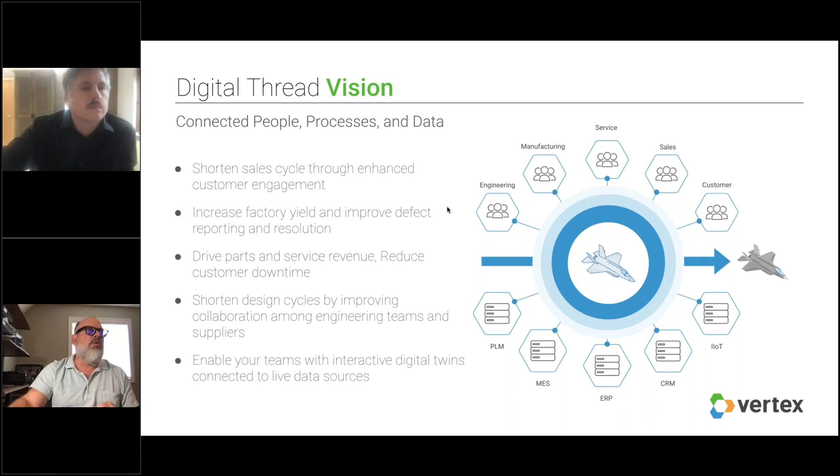So now I want to kind of take a look back and really assess where we're at. Frankly, because we do have some work, and that's one of the reasons Vertex is a company and why we're here today. We think we can help with this. So the reality is engineering still struggles with sharing product data downstream, or look at it from outside looking in. Other groups really struggle with getting engineering data out of engineering. And so there's still siloed departments, and this can be both technically and of course culturally as well.

We know that manufacturers look at problems differently than design engineers, service engineers, those kinds of things. Again, the struggles with PLM access. I think the folks like Siemens and Teamcenter, they've made some great strides in working on some of these aspects of system of engagement, including having more task-based UIs and those kinds of things. But I think we could all agree, it's just not quite there for all the groups that need it.

Again, this idea that systems of record, these are fairly rigid systems. You've got a CRM database, you've got an MES database, you've got a PLM database. They certainly have integration possibilities, but they're not exactly what you would consider to be loosely coupled in a way that you could connect them through data linking and data mashups easily with the system of engagement. And so we're trying to help those systems of record achieve that kind of connectivity and nimbleness, frankly, from a data standpoint.

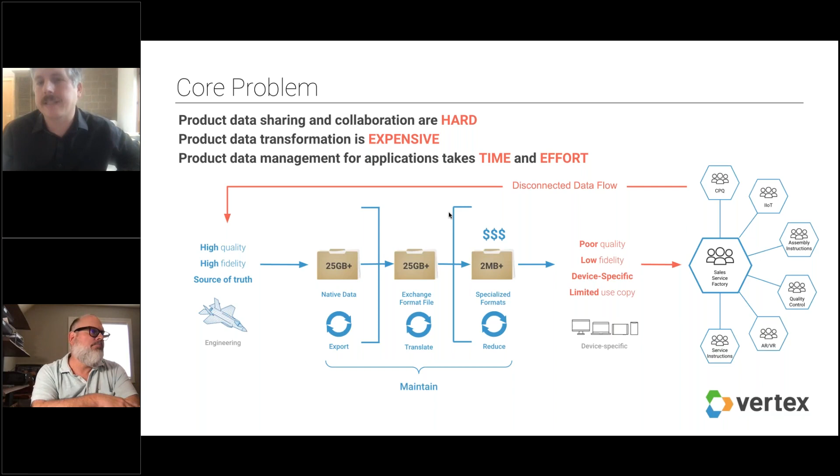And simple things like being able to identify parts and add context to parts or digital twins, it's just disconnected. And it's very rare for engineering to be able to quickly and easily access that. And we'll talk about some of the use cases that could help enable. But the way that we see Vertex helping untangle this digital thread is really, again, trying to get your product data, and there are some challenges on why that product data is so hard to communicate in the digital thread.

I would say certain data sets that are more relational in nature, think about something like a defect issue or a service ticket. It's structured information, and that can easily be used in a data architecture where I can create a mashup of those different data sources and deliver that downstream. However, with engineering data, there are some fundamentally core differences, and like we were talking about before, there's some sensitivity with intellectual property on that.

The end user interface is complex. Not everyone's a CAD designer. You need hardware, you need software to view it. And Vertex really frees the constraints of this.

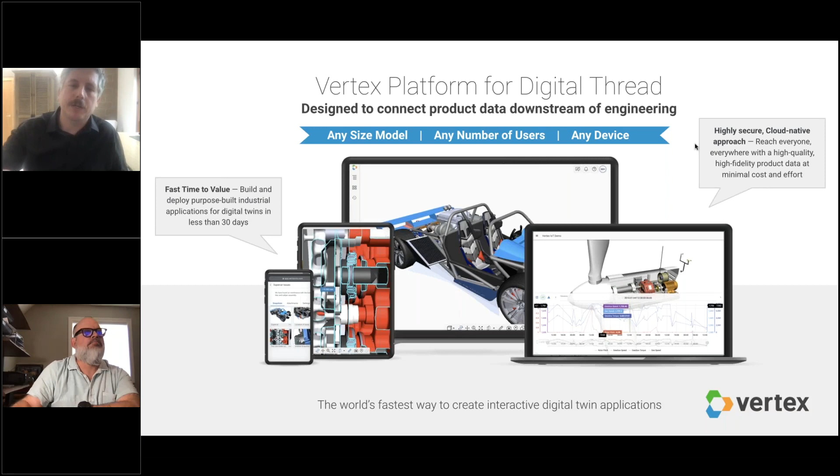And if I'm in field service, how do I get access to telemetry coming from that product? How do I get access to the exact configuration, the serial number of that piece of equipment? How do I identify parts? Those things are very specific to me in the field, versus manufacturing, where it's totally different. And same thing with, we've got plenty of customers using us for things like sales and engineering design collaboration with the supply chain.

What makes the Vertex platform different? One, instead of trying to figure out how to do a file-based approach where I'm passing these files along the digital thread, we've really thought through, if I can get that data into one place, and keep that data centrally located so I have access control, now I can manage consumption of that data downstream. And so the way that we're building our platform allows you to just stream that data. So I'm not actually sending the data, I'm streaming the data to these different groups and connecting that to different systems of record.

We've specifically designed our platform to be easily consumable from both a user interface standpoint as well as an API and SDK. And we've had a lot of success with customers building digital thread and Industry 4.0 applications, specifically for mobile and low-powered devices. And what I'll do here is quickly talk through a few use cases, and then I'll show a demo.

These are some customer problems that we've been encountering both with prospects and our current customers. But the big one is, can I get the digital thread to help me understand and improve my designs? Can I send that design out to get DFX type feedback? Can I get information about issues with design for manufacturability, service, warranty? When I go to build the next iteration of my design, how easy is it for me to collect all that feedback and look historically at how the design was performing?

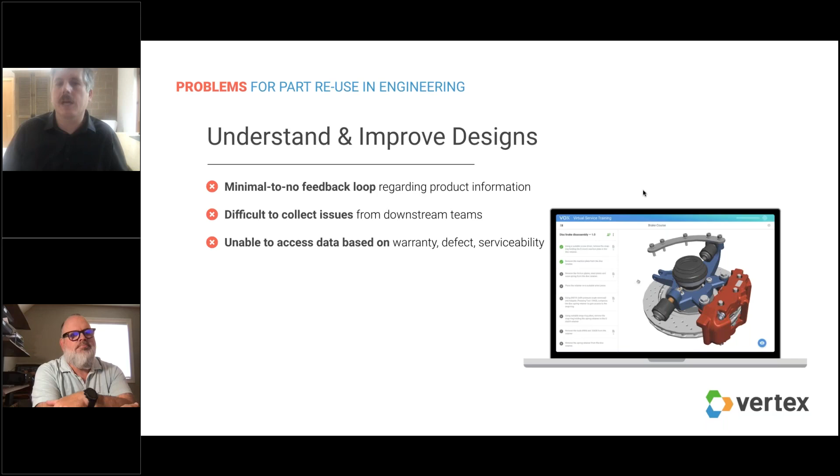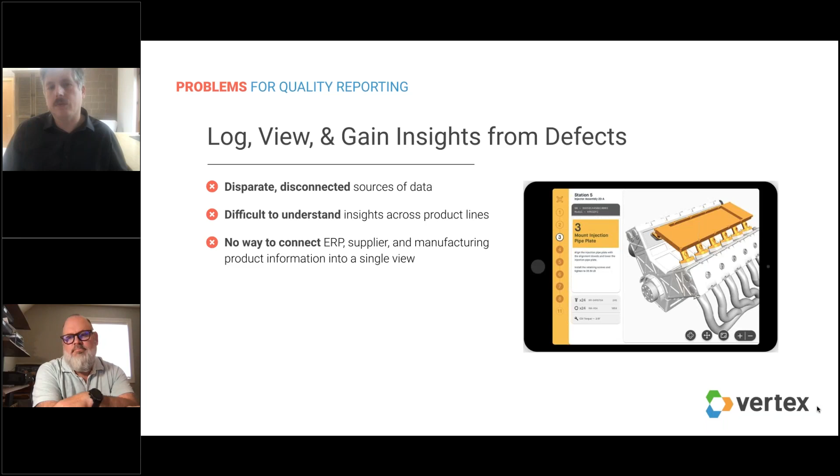Another interesting problem that we've been solving along with digital thread is logging and viewing defects as the equipment is being built on the shop floor. So typically, these are separate systems between PLM, MES, and let's say the issue management systems. But what we've been able to do with some customers, and I'll show a demo of this in a second, is connect these things together so that I can easily log insights and quickly visualize those issues.

The last problem, and I'll show this as well, is being able to connect service to an actual digital twin. So taking the actual IoT data coming off of a piece of equipment, connecting that back to the digital twin in the PLM system, and that would allow me to have rich interactivity. Otherwise, I'm looking at static images, trying to understand which parts I need to replace. And most often you're working with outdated work instructions and field manuals.

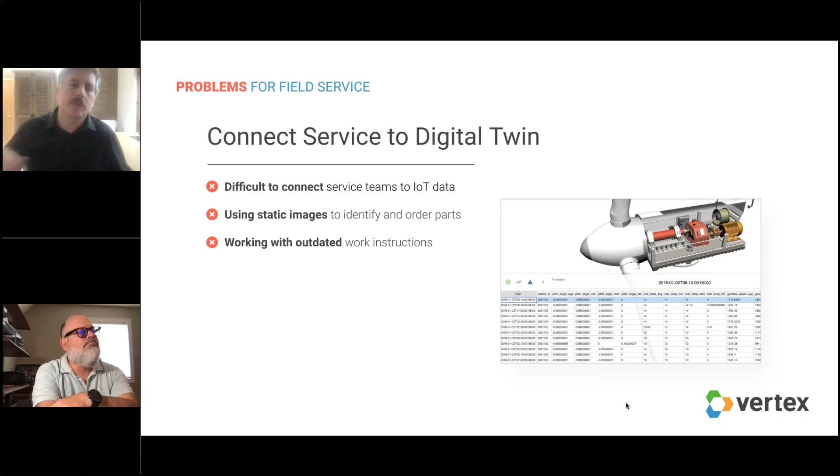So with that, what I'm going to do is give a quick demo here, and everyone can try out these demos. If you go to our developer portal, developer.vertexvis.com, I'm going to click on the examples page here. And what we've done is built some open source example applications with our platform. So the first one I'm going to show here is 3D work instructions. If you click this launch app button, this will fire up a new window.

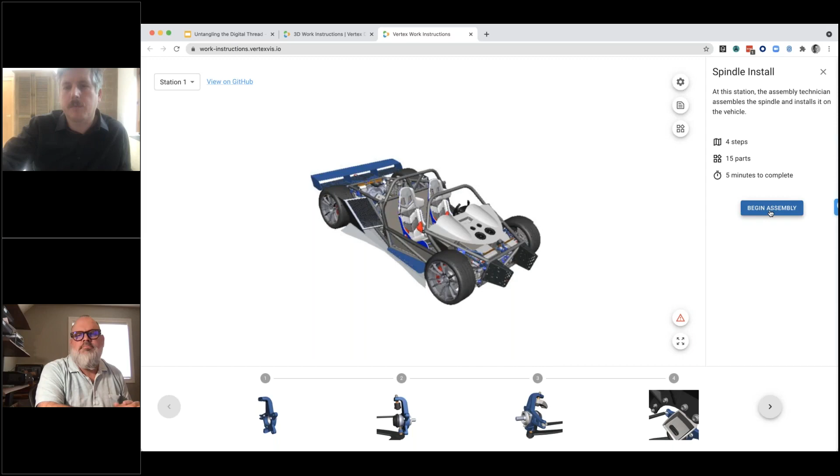And what you can see here, we've got a kit car. I'm going to click begin assembly. And what you're seeing on the screen really is the actual digital thread connected to the PLM system, connected to the MES. And this allows me to do rich interactive 3D work instructions, right?

Sorry, I'm getting a little bit of a delay. There we go.

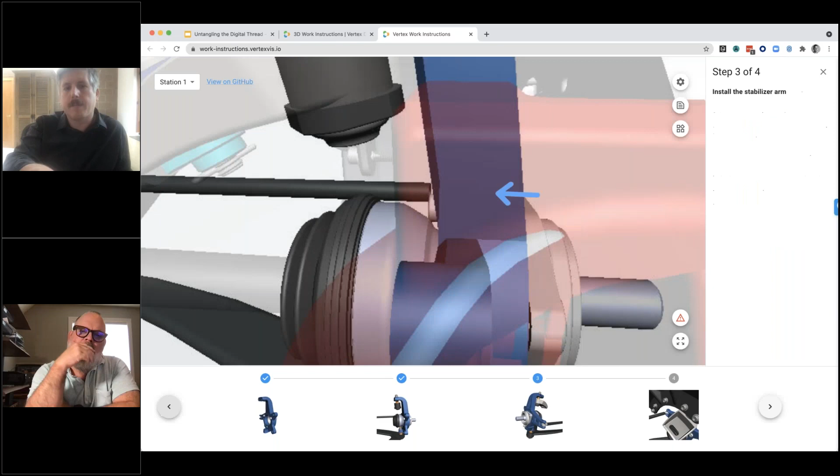So I can click step by step through this example application, get the work instructions. And the cool thing about this is, connecting this to the digital thread, let's say this bolt was stripped as I came across it. Now I can click here, report an issue.

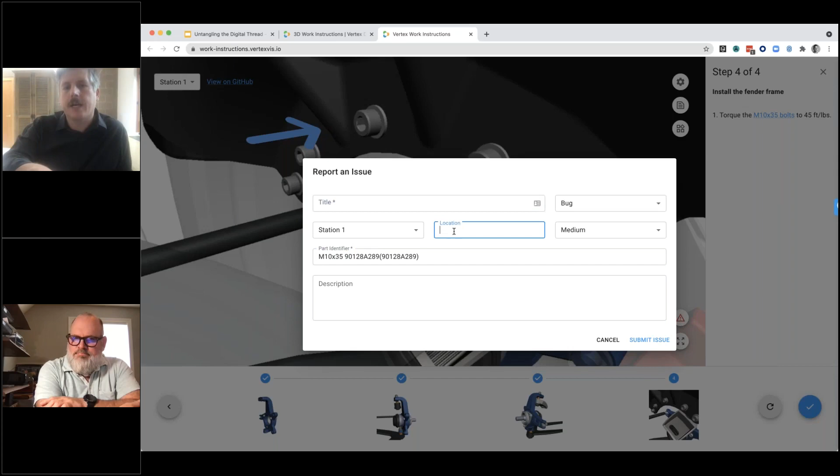And when I report that issue on the shop floor, I'm actually getting the real part ID. Not just the part number, but also the part ID associated to where that is located on that 3D model. And so I can go through here and log a specific issue, submit the issue, and then that will go back into your issue management system.

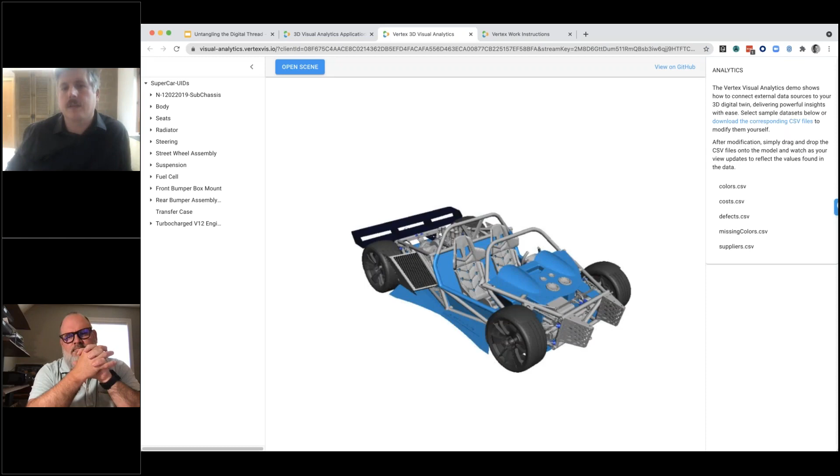With that, I'm going to show another example. Let's say you had collected a lot of those issues and you wanted to visualize all of your data across a digital thread in the context of this same car here. So if I click on defects here, I had logged all those defects. Now I can start actually visualizing this information. And by the way, this is all web-based, so anyone in the company could access a system like this, right?

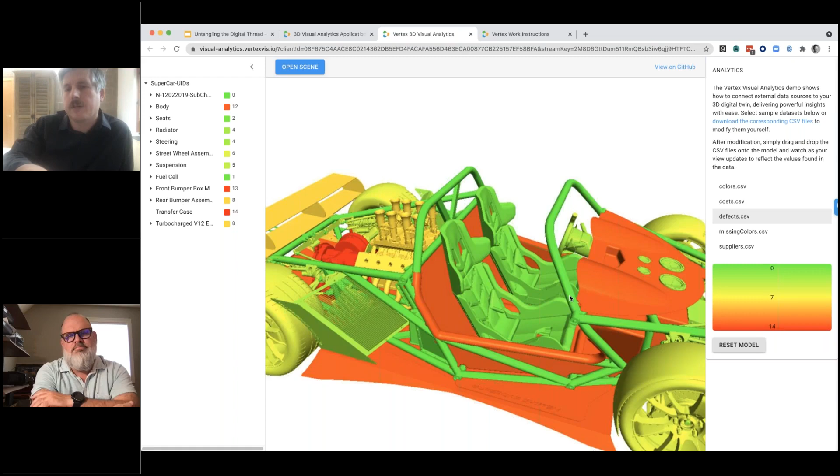Imagine all the types of data analysis that you're doing with a system like Tableau, where I'm doing queries across different systems, being able to pull all that context together to give me better insights on my model. So basically, any business intelligence application or data warehouse or data lake that you're currently using, it's fairly easy to wire up to get this kind of 3D context as well, right? Absolutely.

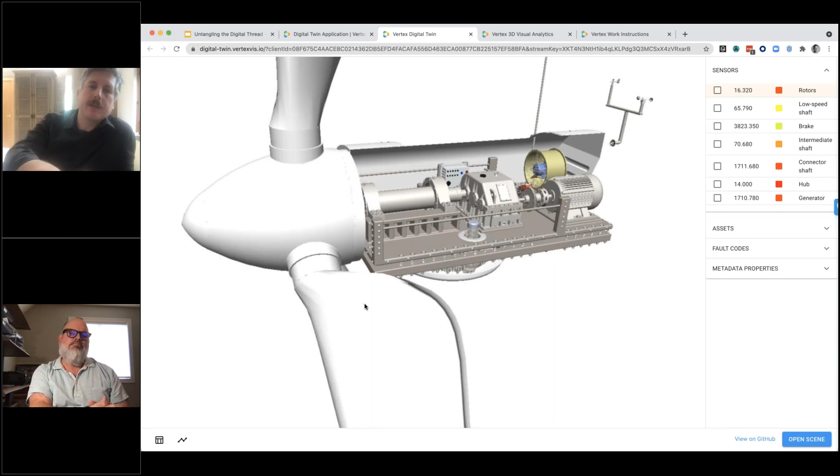And one more application that I'm going to show on our examples page here is the digital twin. Digital twin's kind of a loaded term, I know, but I would classify this type of digital twin as a data twin. I've got my product data up here. So again, this is a specific configuration of this wind turbine, but I'm collecting a lot of data, a number of different sensors, right?

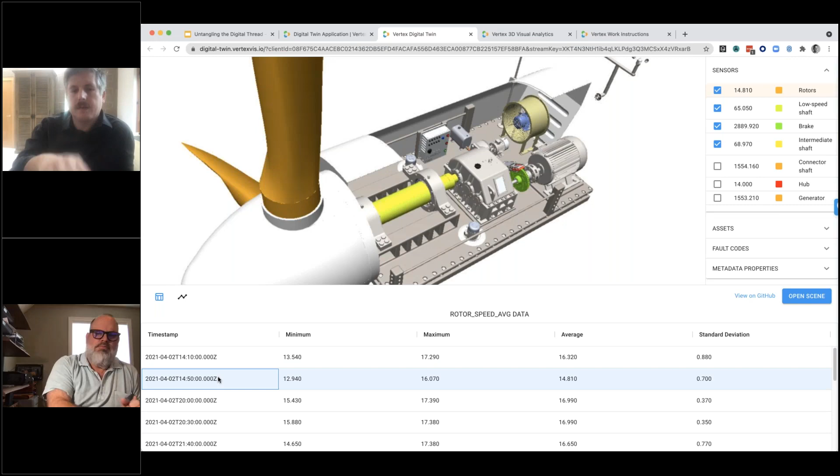And so I can start to turn on some of these sensors and then step through different timestamps for those sensor values and really see where there is an issue in the system, and again, tie this back to maybe that issue management system. Now I can actually identify parts on here and communicate back to base about what I'm seeing with this piece of equipment.

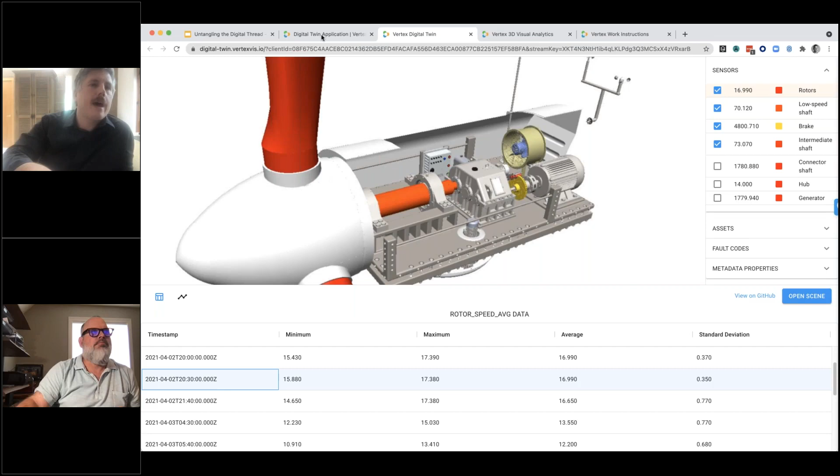So the theme of all of this with this webinar is taking that product data and connecting it to different systems of record. This can be IoT, but like I said, it can also be your MES system. We've done a variety of integrations, and it can really help improve that feedback loop. So with that, Rachel, I think we'll go to some questions.

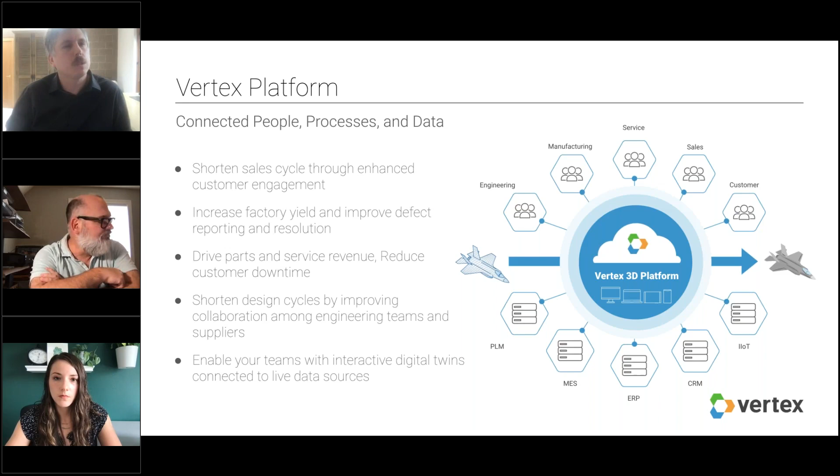Great. Well, we actually did get one more question in. I know that there are a couple people still on the line, so we appreciate you holding on just a little bit longer, but we did have another question come in that I wanted to pass over to the two of you before we close out. Who are some of the competitors or alternate solutions to something like Vertex?

Well, I think we just touched on one. Coming into the market, some of the customers that we've been working with will often try to use, let's say, a game engine SDK, or even some SDKs provided by their PLM vendors. And from our perspective, I think those work up to a certain point. But if you start to really look at the underlying technology that enables some of those SDKs to work, you're still relying on the end device to do a lot of the heavy lifting.

And what we found is some of the more interesting applications of the digital thread and digital twin are actually out in the field, or maybe on the shop floor where you don't really have a high-powered device. And a lot of those existing competitors of ours really rely on doing all the heavy workload on device. There are some things where you can do that, let's say small BOMs, tens of parts. But once you get to hundreds, thousands of parts, things start slowing down.